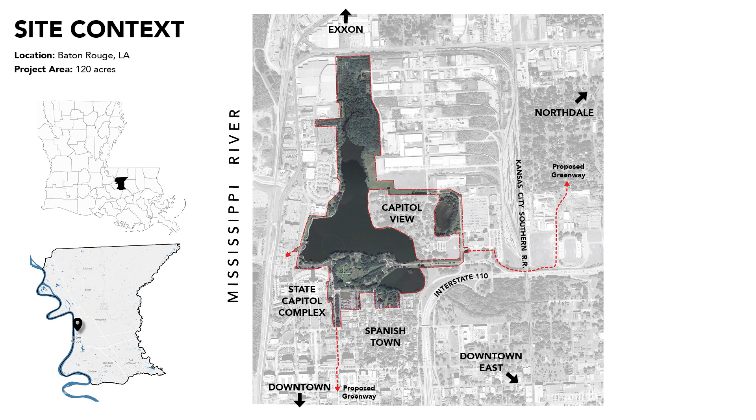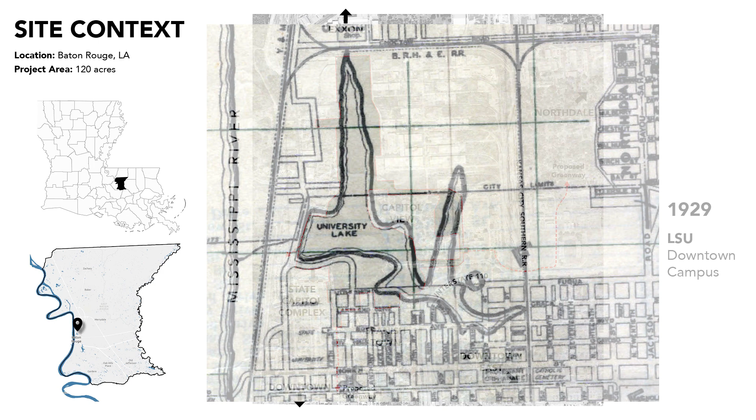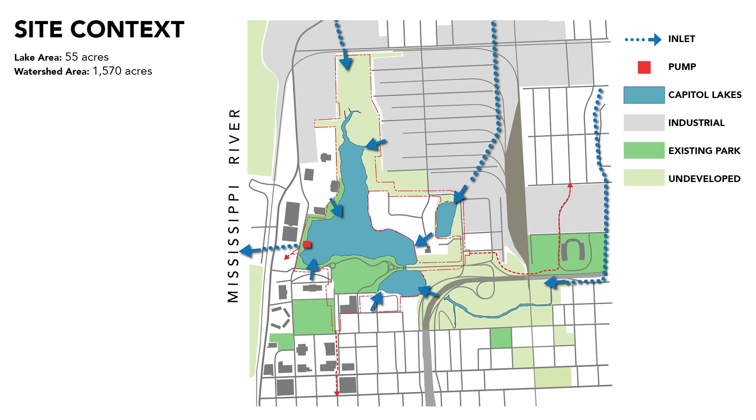This watershed has a rich natural and cultural identity that needs to be protected, as it was once a bayou that flowed directly into the Mississippi River. Today, it is a 55-acre man-made lake system that collects urban and industrial runoff before pumping it into the river. Yet, to this day, the land remains a public open space and also a stopping point for many migratory bird species. If there is no vision put forward, the EPA could potentially cap and fill the lakes, erasing valuable habitat and public natural amenity from the capital city.

In this vision plan, the first goal is to restore the lakes to function more like a natural system. Based on the EPA's previous PCB cleanup projects, this design assumes that the top 2 feet of sediment will have to be removed from the lakes and treated off-site. This major disturbance will provide an opportunity to implement green infrastructure systems and build aquatic habitat along the lake edge. There are 3 main strategies to revive the lake system.

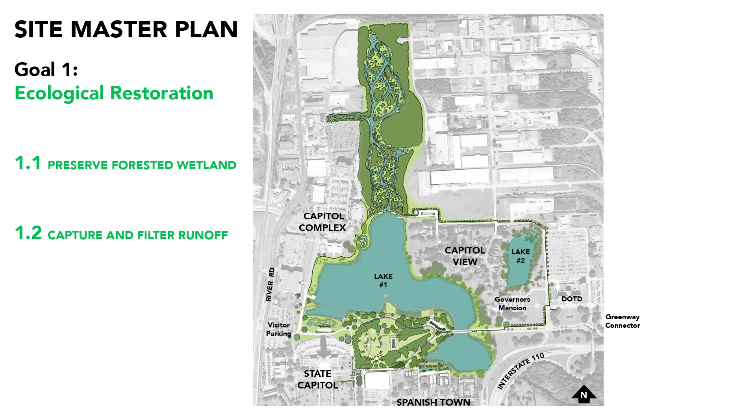The first is to preserve the natural forested wetland wherever possible during the cleanup process to maintain biodiversity and the park's natural identity. The second strategy is to add forebays and constructed wetlands at all the main inlets. These shallow marsh wetlands will filter out sediment and pollutants from stormwater runoff and prevent the need to dredge the entire lake system again in the future. Continual monitoring of these systems will also indicate where pollutants might be entering the lakes.

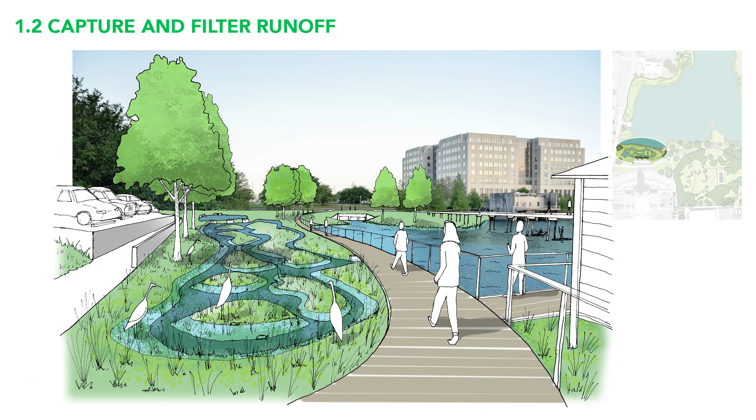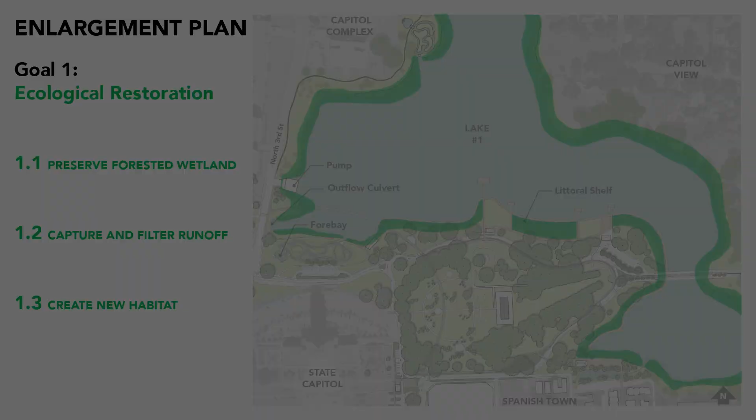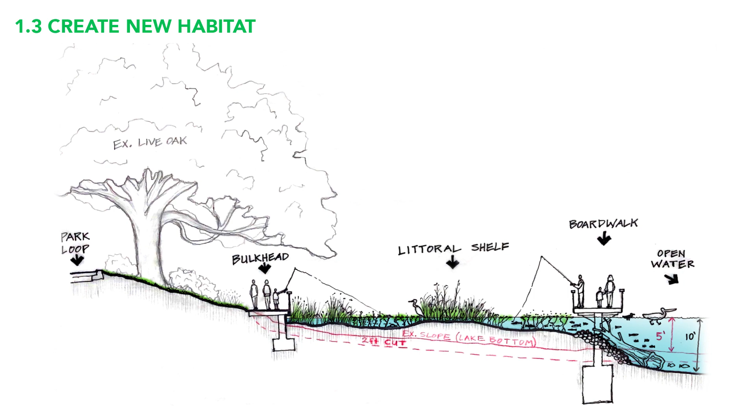The third intervention is the littoral shelf, a shallow vegetated zone along the shoreline that acts as erosion control and habitat for wading birds and other aquatic life. This idea of a living lake edge is taken from the nearby University Lakes Restoration Project and has been successfully implemented at the Memorial Park Eastern Glades in Houston, Texas. After the initial sediment removal by the EPA, additional deepening of the lakes will also improve water quality and fish habitat. This dredge material, along with the existing riprap, can be repurposed to construct the wetlands and the littoral zones.

The second major goal of this vision plan is to reconnect communities to nature and to each other with bike and pedestrian greenway connections. Previous planning initiatives have proposed a greenway trail that will connect all the way from Southern University to Louisiana State University and farther south. Portions of this have been completed, but there is a missing link here at the Capitol Lakes at the intersection of I-110 and the Kansas City Southern Railway. This project proposes a greenway segment through the Capitol Lakes Park from the downtown greenway to Memorial Stadium Park, reconnecting communities to park space and downtown amenities.

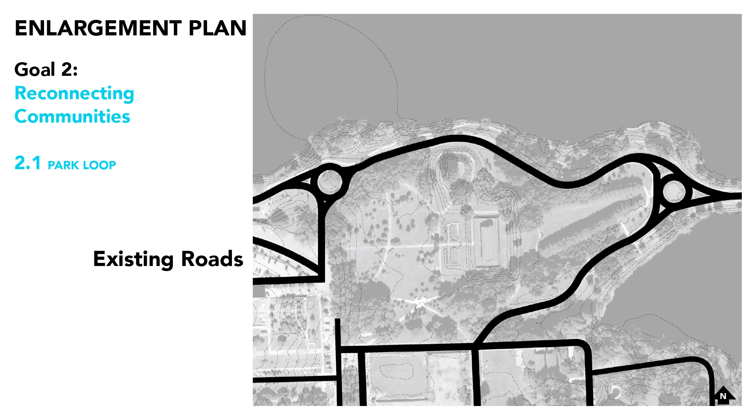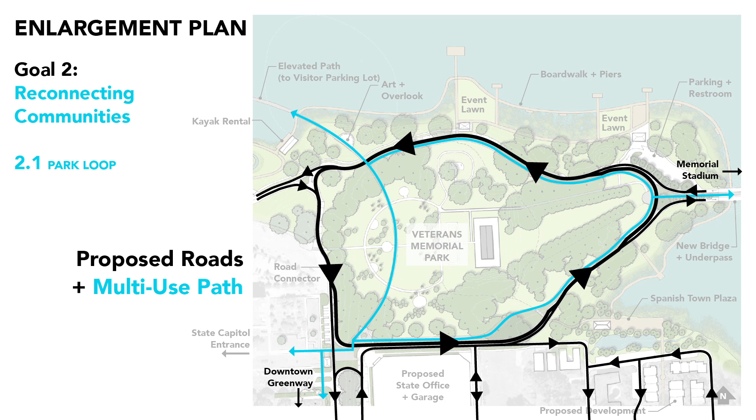There are several other interventions within the park that will enhance both the vehicular and the pedestrian experiences to encourage more interaction with this urban oasis. The first is the park loop: connecting and reducing the existing roads to a one-way loop will make room for a new bike and pedestrian greenway connector without disturbing the existing live oaks along the scenic drive, and it will connect the lakefront to the existing Veterans Memorial Park. As a result, visitors can easily and safely navigate the park from all 3 directions.

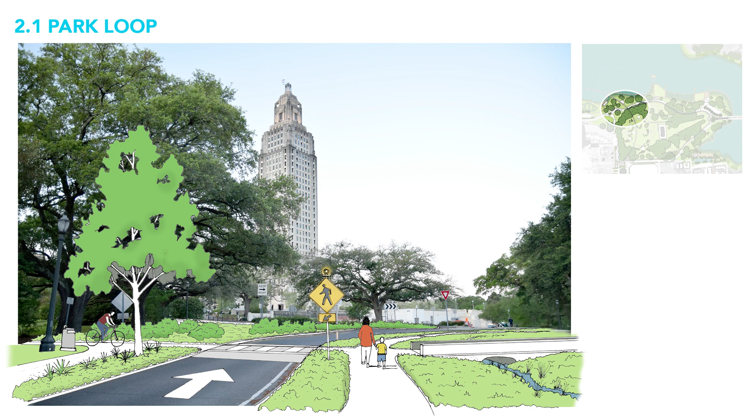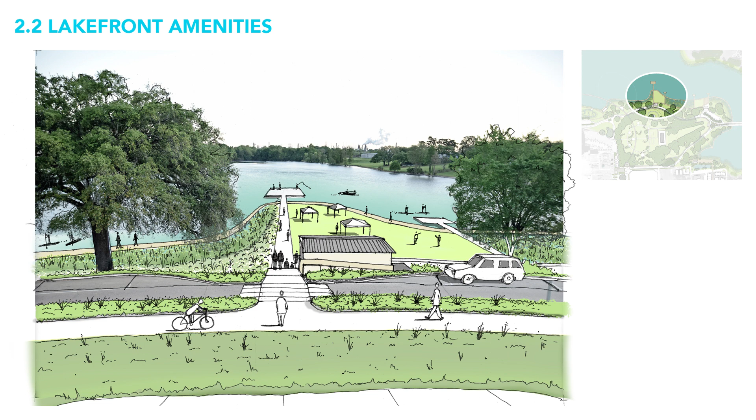The new lakefront will have various park amenities, including looping paths, waterfront boardwalks and gathering areas, shade pavilions and restrooms, fishing piers, kayak and bike rental kiosks, and a boat launch. These amenities will provide recreation and environmental education opportunities to state capitol visitors and locals. The existing Veterans Memorial Park will also be improved with a new hierarchy of paths and a more formal sequence of monuments, while maintaining its flexible event lawns.

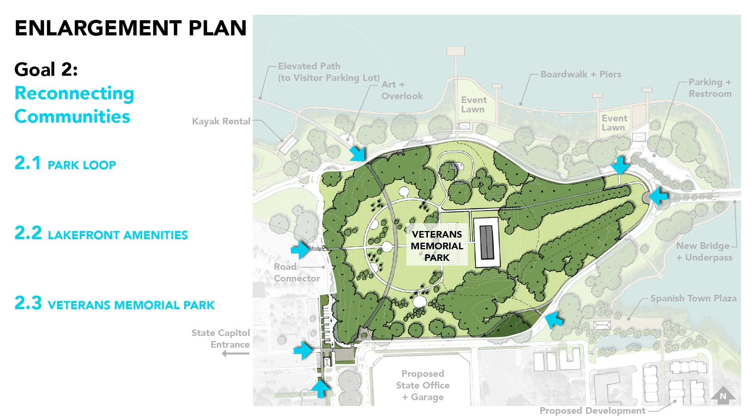With a new nature-focused park and a completed greenway trail system, the Capitol Lakes Park will better serve the people of Baton Rouge, bringing them back to nature and to each other. By combining the EPA's cleanup efforts with a strong vision for future development of the site, Capitol Lakes Park can set a precedent for environmental restoration and stewardship for the many other Superfund sites across the state and the country.